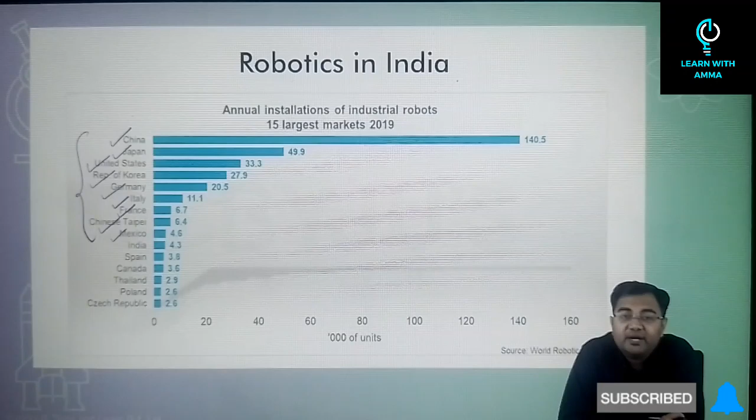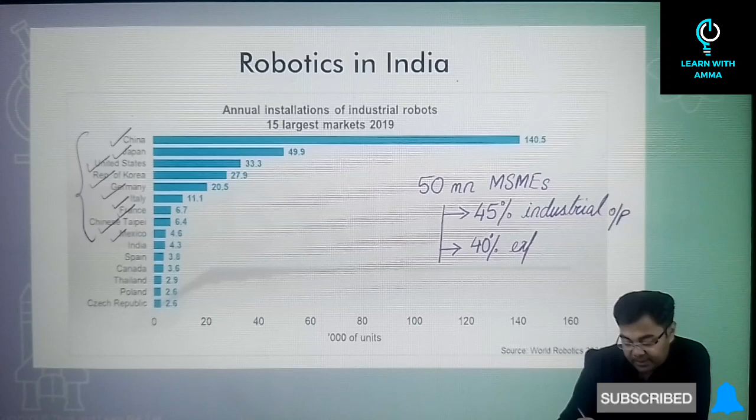If you try to analyze Indian industries, take a report submitted by the Ministry of Micro, Small and Medium Enterprises, that is MSME industries. According to that report, there are approximately 50 million MSMEs in India. This industry gives approximately 45% of industrial output and is responsible for approximately 40% of exports from India.

Now if you look at the penetration of robotics in all these industries, you'll find that we're probably nowhere. This is one area with huge scope for robotics to enter and completely change the output, increasing both output and efficiency. We generally think a lot of jobs will be lost to robotics, but that won't be the case here—because of the expansion possible from introducing robotics, a lot more jobs will actually be created in these MSME industries.

Even in industries where we are using robotics in India, such as the auto sector, the generic drug industry, or even the Indian IT sector, robotics has penetrated the Indian market. But even there, what we've observed is that although robotics is being used, the robots are not made in India. Most of these industries are actually using vendors which are foreign, relying heavily on them.

So the issue we see here is, first, the penetration of robotics in India is very low. Secondly, even in the certain sectors where robotics has entered Indian markets, the robots being used are not India-made—they've been acquired from foreign vendors. That's why there is huge scope for robotics to take off in India.

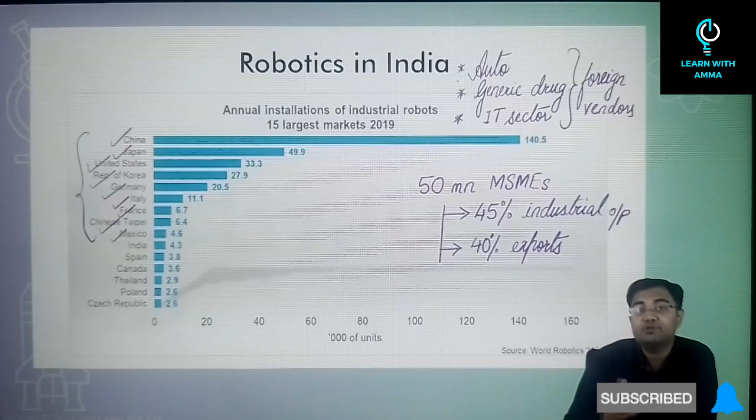One of the reports has said that if you look at the years 2020 to 2025, there will be a compounded annual growth rate of 13.3% in the sector of robotics. This is one of the values that has been given in one of the reports.

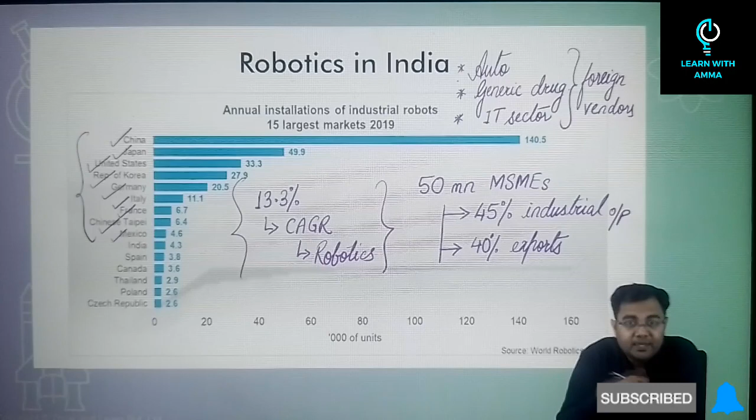So these are a few things with respect to the Indian industries today and the Indian scenario with respect to robotics. This is something that will also drive the future of robotics in India. In the next few years, or rather the next couple of decades, we might see robotics in India enter in a huge number, and we'll be able to see the application of robotics in various sectors and segments of the industries in India.

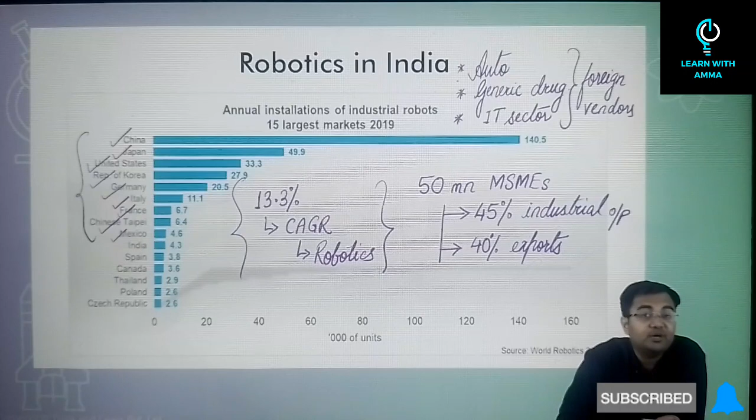So this is what we know of robotics. But before discussing the future, or where robotics can come handy for the Indian industries, let's try to understand what are the challenges that we have in the sector of robotics in India today. So what are these challenges?

The first challenge is lack of hardware ecosystem. We just discussed that we are not producing a lot of robots in India. Even if robots are being used in some of the sectors, we are taking it from foreign vendors. So what does it mean? That a lot of hardware has to be imported. It simply means that it becomes very difficult for somebody to even think of implementing robotics in some areas or sectors, because you will have to get all these robots from foreign vendors, and that also includes the cost that comes with it.

So that's why it overall increases the entire process cost, and because of that the process would not want to incur so much high cost. So that's why we are looking at alternatives. That's why we are hesitant in going to robotics for these industries.

Then after that, financial incentives. If you talk about imported robots, first of all, there will be an 18% GST that will be put. And apart from that, almost 7.5% of general custom duty will have to be paid because of the import. So in total, we are talking about approximately 25 to 26% of taxes that will have to be paid by anyone importing the hardware from a foreign vendor. So that's another problem.

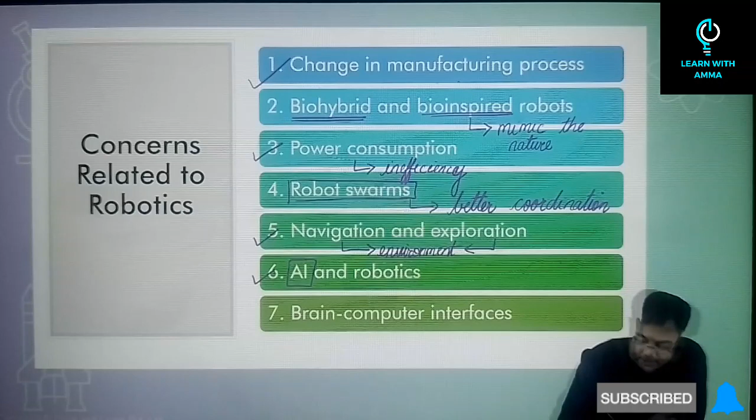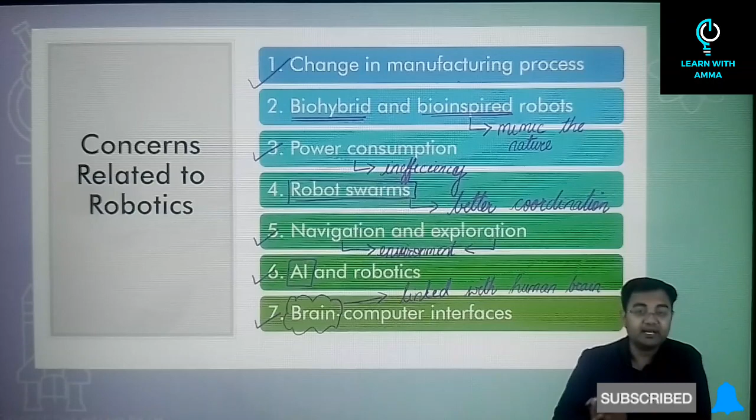Then after that, brain computer interfaces. Here we are talking about computers that can be directly linked with the human brain, so that guidance can be provided by humans without having to program them much or make them learn a lot about their surroundings. In this manner, the efficiency of robots can be improved if these kinds of systems, the BCI systems or brain computer interfaces, can be made — this can also lead to a better future for robotics.

Then after that, social interaction. And social interaction perhaps is one of the biggest challenges.

You cannot make the robot learn or behave in a manner that humans do. They perhaps will not understand the emotions, correct? And this is one of the biggest challenges that the world is going to face in development of robotics.

Then after that, medical robotics. Today we have seen that there are surgeries where robots are being used, and this is perhaps going to increase in future. But at the same time, we do not have robots that can go for routine procedures, who can take care of procedures where perhaps they would only have to call a surgeon or a doctor when there is a patient specific step required. So in that case, again, we will be able to increase the efficiency of the healthcare sector. We'll be able to employ more robots, and will be able to make better use of our doctors in future.

Then after that, robot ethics and security. And this is again one of the bigger concerns with regards to robots today. Now, what all could happen? For example, what we can observe, or what may happen, is that robots may entirely take over humans. Wherever you needed somebody to supervise the work, perhaps you don't need a manager anymore, but rather you are making use of robots and automation services that can entirely replace human use in such cases. Then apart from that, what else can happen?

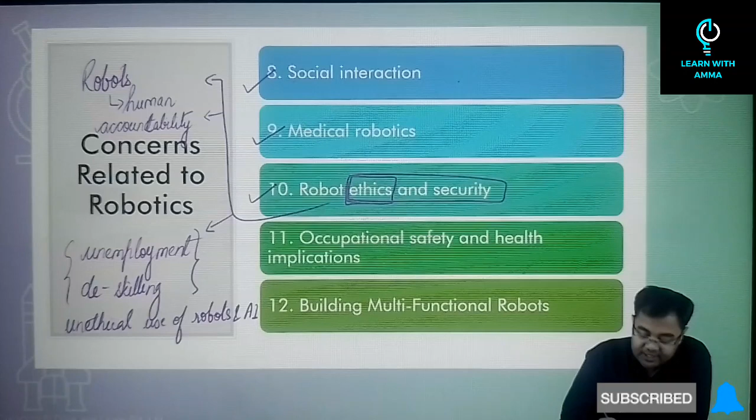So because of all these things, we do say that robot ethics today is one of the biggest concerns that the world is facing. With the automation industry booming all over the world, we are looking at a lot of areas, a lot of sectors which are employing robotics. So with so much development happening in this sector, there are chances that we might stop looking at the ethical point of view. We might overlook all the ethical concerns, and this will be a major problem in the coming future if it is not checked in time.

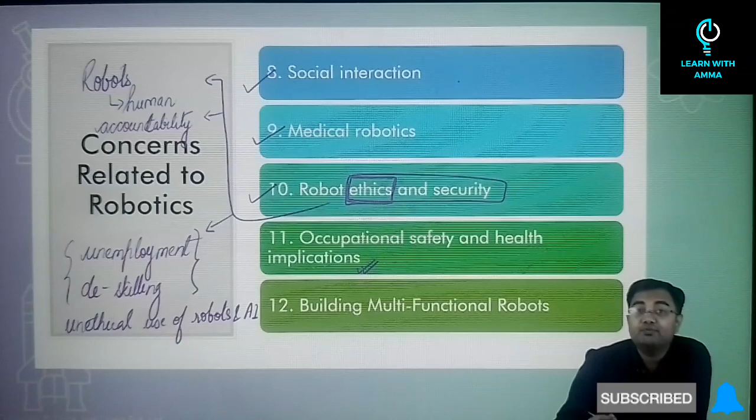Then after that, occupational safety and health implications are there. We need to understand whether it's a safe environment wherever humans and robots are working together. The materials that are being used in the robots, are they good enough? Are they safe enough? Do they have any health implications? All these kind of areas also have to be pondered upon in a better manner.

And then one last thing, building multifunctional robots. So today we see that most of the robots that are being used can be used only for one function or the other. They are being made very specifically. So we have to understand that the future of robotics also lies in multifunctionality of robots. If there is a single robot that can work in various environments, that can do various functions, then this robot will be of much better use as compared to robots which are highly specialized.

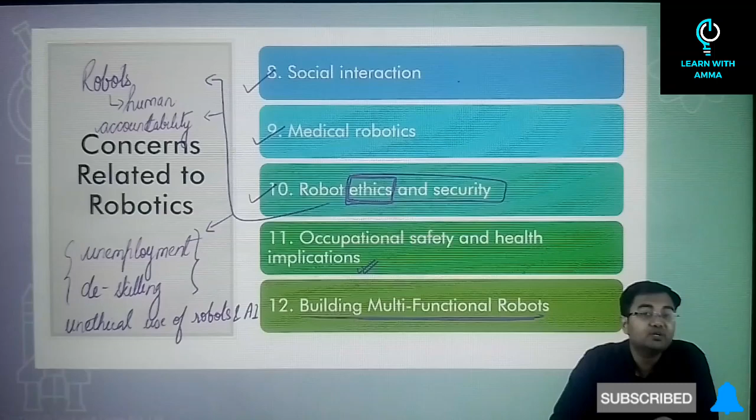So this is again something that has to be looked upon, and this is a concern of the present, that the robots we have today are pretty much single functionality robots, very specialized robots. And if we are able to build multi-functionality robots, then we'll be able to build a better future. So these are some of the concerns that we have with regards to robotics today. Then, as we discussed, we need to understand what is the future of robotics in India. Today, as we discussed, there are only a couple of sectors where robotics is functioning well.

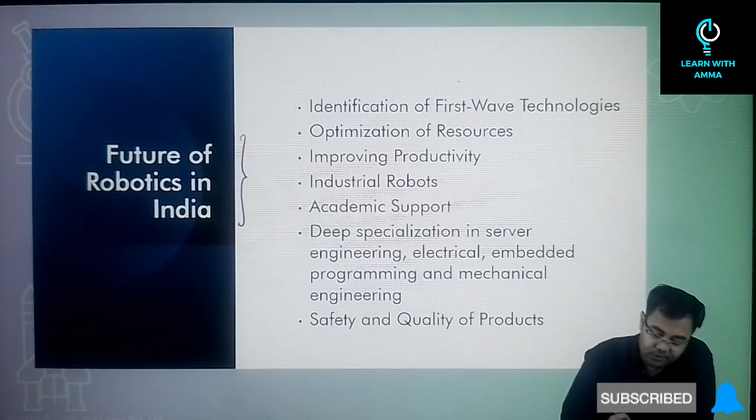If you look at the future, there are a lot of ways in which robotics can be made use of. First of all, we have to identify the first wave technologies - the kinds of sectors that will start the work of robotics in India, that will guide the way. For example, the IT industry today, or generic drugs that are using robotics today, these are kind of first wave technologies. We have to identify all the sectors that will be the first few to take robotics into India.

Then, optimization of resources. Once robotics is introduced, it will help optimize resources, and we'll be able to use them in a much better manner. We'll be able to improve productivity, because you are using robots in areas where you were just making use of mechanical work for a human. You will be able to enhance productivity through automation and robots. Then industrial robots are going to lead the way - whether assembly lines, welding, or packaging, these are areas where we can make use of robots.

Then, academic support is required for a good future in India. Today we don't see a lot of areas of development, though certain courses have started - for example, in some engineering colleges and IITs, robotics is being taken very seriously. You need to provide support and infrastructure to students so they can learn better, apply concepts better, and become better engineers and scientists for good development of robotics in India. This academic support becomes very important.

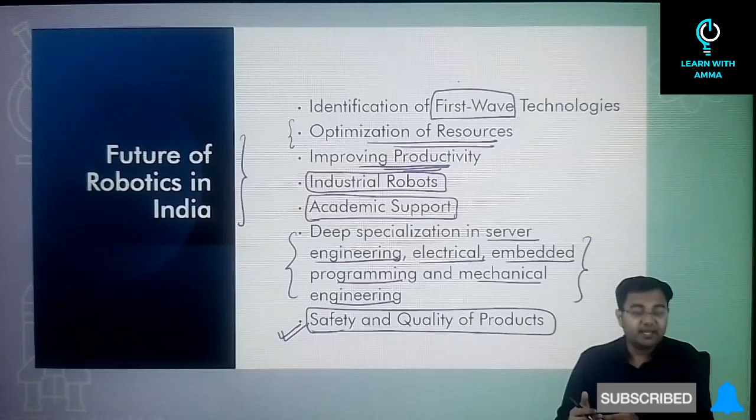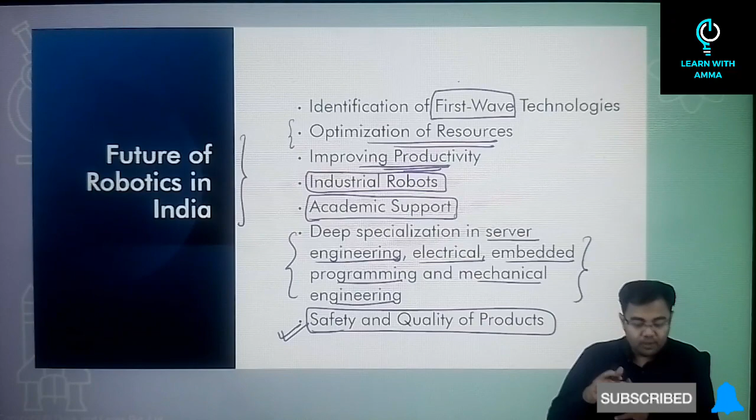Ultimately, the future of robotics in India is also in the safety and quality of products - improvement in safety of products, quality of products, and safety of people working in these industries. This will be very important for building a good future in India with regards to robotics. These are the areas that will guide the robotics sector in India and enhance the productivity of various sectors with the help of robotics and automation.

This brings us to the end of this chapter of robotics. Although it is a small chapter with not a lot of concepts, it can be very crucial for both prelims and mains examination. What are robots? What are the components of robots? What are the applications of robots? What is happening with regards to robotics in India? Challenges and future of robotics in India - all these concepts can be asked in mains examination as well, so you have to be prepared with all these things.